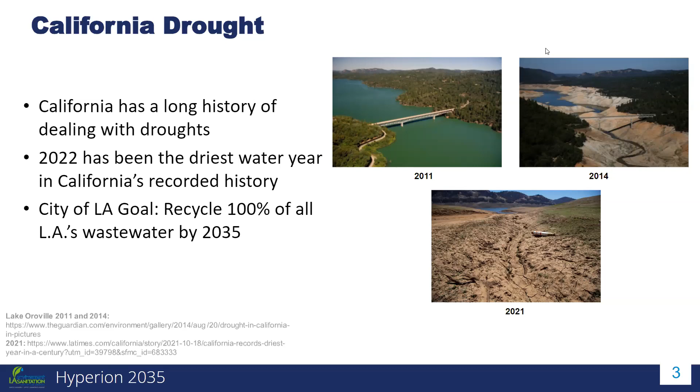So we definitely, as a city, our main goal is to end up recycling 100% of the wastewater coming into the city by the year 2035. This map shows where LA currently gets its freshwater supply. The majority comes from the State Water Project, Colorado River Aqueduct, and the LA Aqueduct. Currently we get about 17% of our water from local sources, about 15% from groundwater and about 2% right now from recycled water sources. We want to work on eventually recycling all the wastewater coming in, which can help us become more resilient to droughts and also other natural disasters like earthquakes that can impact our water infrastructure in the state.

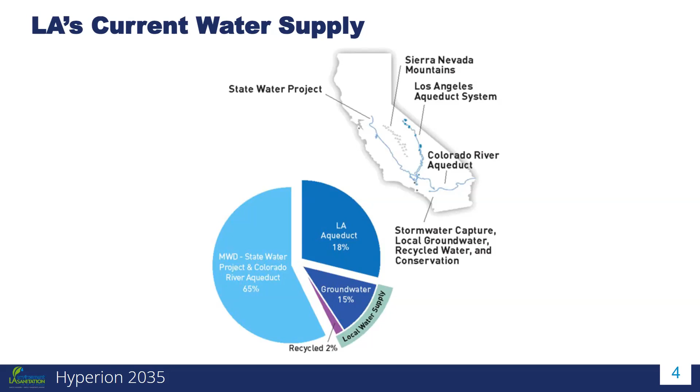So the evolution of water reuse. To provide you with some history, water recycling and reuse has actually been around for a very long time. There's evidence of agricultural irrigation with wastewater back in 3000 BC in Greece. Beginning in the 20th century, planned water reuse became very important as a way of conserving our freshwater sources, so landscape irrigation became more common. In more recent years, industrial reuse and groundwater recharge have also become more available. Since advanced water reuse technologies have improved, we've also been considering indirect potable reuse, which is implemented in some areas, as well as eventually direct potable reuse. Regulatory agencies like the State Water Resources Control Board in California are working on finalizing regulations for direct potable reuse currently.

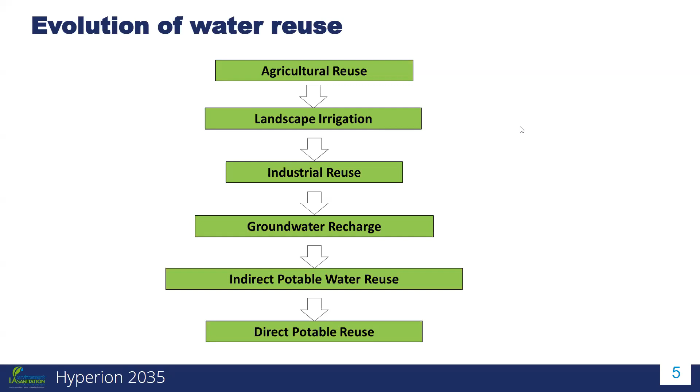This schematic shows the process for indirect potable reuse, or IPR. The idea is that wastewater coming from residential, commercial, and industrial sources, after it goes through conventional wastewater treatment, would also go through advanced treatment. There are two types of indirect potable reuse here. The first is groundwater augmentation, where following advanced treatment, the water could be spread or injected into a groundwater aquifer. The other type of IPR involves surface water augmentation. Both options essentially provide an additional environmental buffer following the advanced treatment. After a certain amount of time, approximately a couple of months for groundwater augmentation and several days for surface water augmentation, the water would be sent to a drinking water treatment plant and then distributed back to the city.

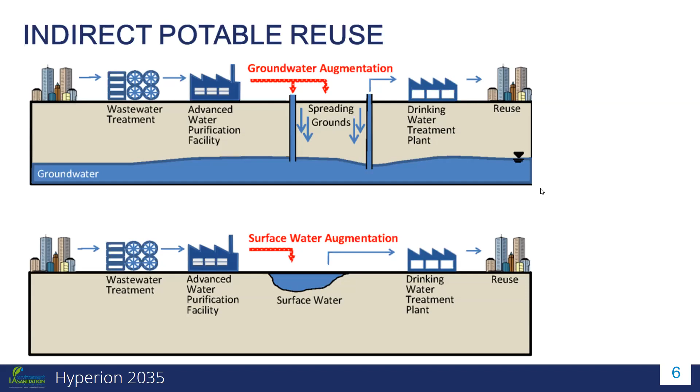And this is a schematic for direct potable reuse. So this is what we're working towards eventually. There are two types of DPR that we can talk about too: raw water augmentation and treated drinking water augmentation.

For raw water augmentation, following wastewater treatment and advanced treatment, the water could be sent directly to a drinking water treatment plant and then distributed back to the city. For treated drinking water augmentation, following the advanced treatment, that water would be considered clean enough to enter the drinking water pipelines directly and be distributed.

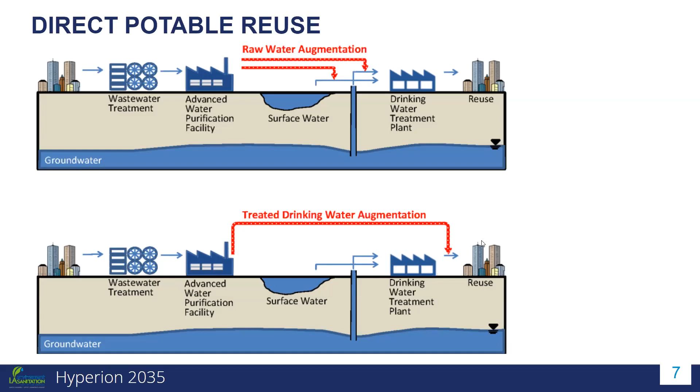So now to get into an overview of LASAN's Clean Water Program and how we've implemented some of these water recycling programs, as well as what our plans are for the future.

As I assume you know, wastewater is generated from residential, industrial, and commercial sources. So if you live in the city of LA, if you take a shower or flush the toilet, brush your teeth, the wastewater is going to end up at one of the 4 water reclamation plants within the city. LASAN also has extensive pre-treatment programs where we work with industries to make sure that what they're putting into the sewer system meets certain requirements.

That's to make sure we can treat the wastewater reliably, and that helps us protect our water reclamation plants as well. So the wastewater then flows through pipelines, either through gravity flow or through pumping stations, and goes to the water reclamation plants for treatment. Currently, the treated wastewater could be either safely discharged to an ocean or a river, or it could be reused for a variety of purposes, like industrial use or cooling water, as well as seawater intrusion barriers. The city's goal is to ultimately close this loop and redistribute the recycled water back to the city.

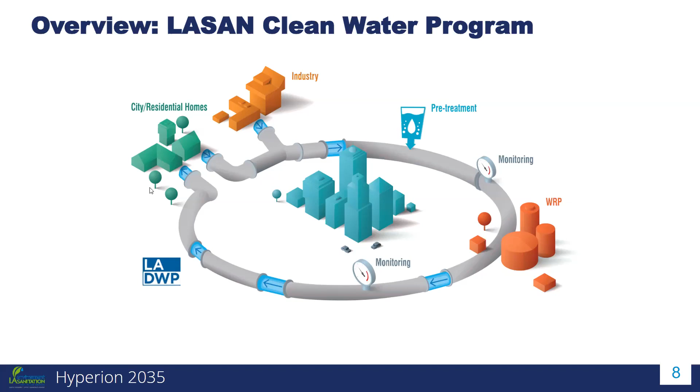So this map shows LASAN's service area. LASAN serves a population of over 4 million residents with an area of approximately 600 square miles and a sewer system length of 6,700 miles. We operate 4 water reclamation plants: Donald C. Tillman, LA Glendale, Hyperion, and Terminal Island.

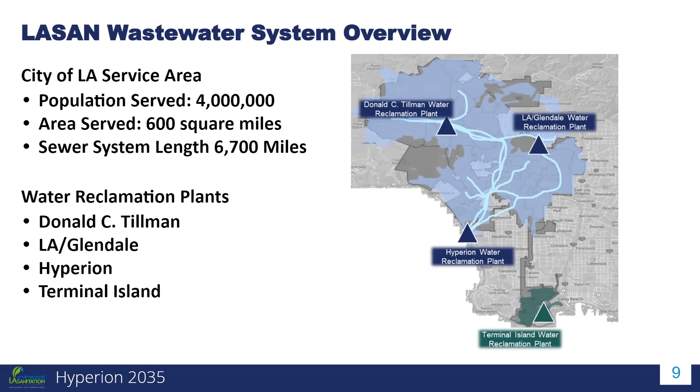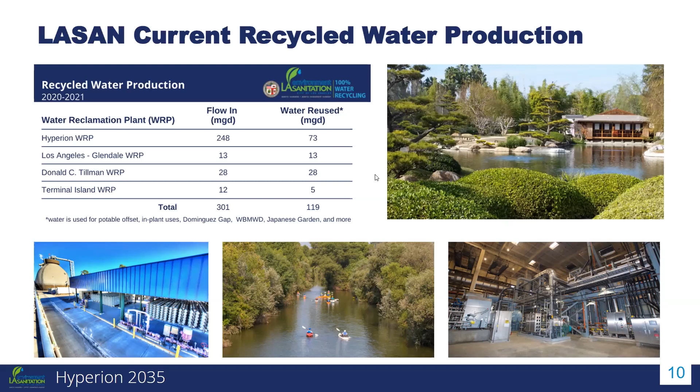And at this point, I'll pass it back to Ryan. I believe he had some questions for us.

All right, so I was able to successfully unmute myself. I wanted to interject because I have such a strong interest in water recycling, which is really exciting effort that we're undertaking. But when you're talking about wastewater, my understanding is that it's not really considered waste anymore, right? We're trying to recycle, reclaim it back. So what do you call it nowadays? And my follow-up question, if we're going to reclaim it, what are the resources that can recover from the wastewater? Maybe we'll cover that in the next slide, but maybe that might be something we all have in common. So I look forward to hearing from Nasir for the rest of the presentation.

All right, thanks Ryan, excellent point and good question. As you mentioned, in recent years there has been a paradigm shift, right? So wastewater is not considered waste anymore, it's considered a resource, and in fact it is a resource, right? So that's why at Hyperion Water Reclamation Plant, we call it Hyperion Water Reclamation Plant. We used to call it, not too long ago, Hyperion Wastewater Treatment Plant, but not anymore. Now we call it Hyperion Water Reclamation Plant.

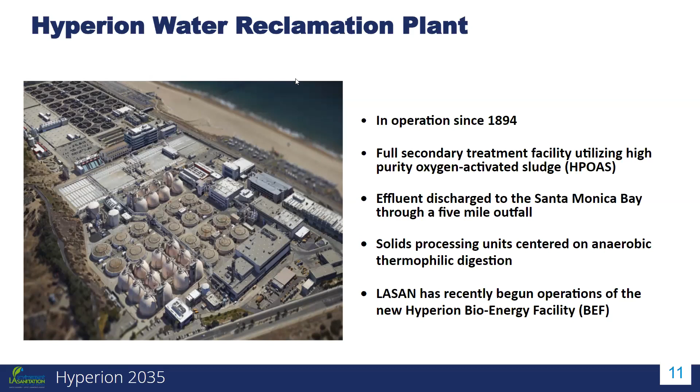After that, we have primary treatment. Primary treatment is to remove suspended particles and some of the pollutants and organics through some large basins by gravity. Why do we prefer gravity? Because gravity is free, so we don't have to consume energy. So it's a very effective and efficient way of removing some of the particulate solids, using primary clarifiers.

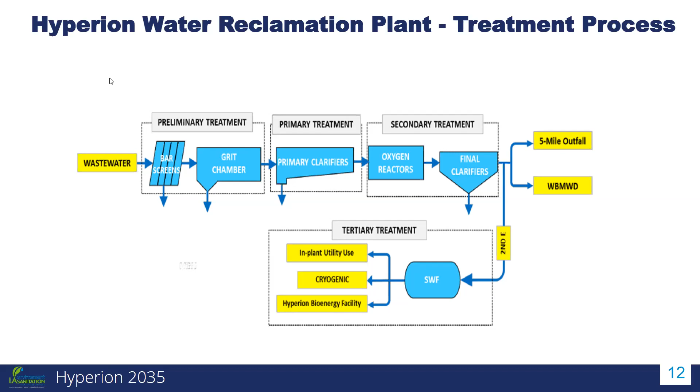Next slide, please. All right, so earlier, Kimia talked about climate change and all the challenges that we're facing: drought and water scarcity. In California, imported water is not a reliable and sustainable source due to seismic vulnerability, climate change, drought, and environmental impacts at the source. So it makes sense to maximize supply from local sources, mainly recycled water, that Kimia mentioned earlier.

So in February 2019, our mayor Eric Garcetti announced Hyperion 2035. This program is to recycle 100% of all Los Angeles wastewater by 2035, and to source up to 70% of all water locally by 2035. Right now, approximately 85% of the water we use in the City of Los Angeles is imported, from the California Aqueduct, Los Angeles Aqueduct, and Colorado River, as Kimia mentioned earlier.

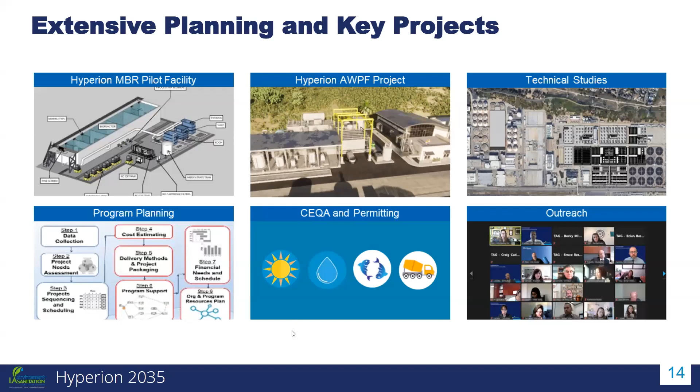So I talked about the MBR pilot project earlier. Again, as I mentioned, this is the proof of concept and cornerstone for Hyperion 2035. This project is a 1 million gallon per day project. It's a joint effort between LA Sanitation and Environment, Los Angeles Department of Water and Power, and West Basin Municipal Water District. The objectives of this project are to obtain regulatory approval for potable reuse application as part of Hyperion 2035, to compare different membrane bioreactor treatment technologies side by side, and also to develop design and cost criteria for the future project, Hyperion 2035.

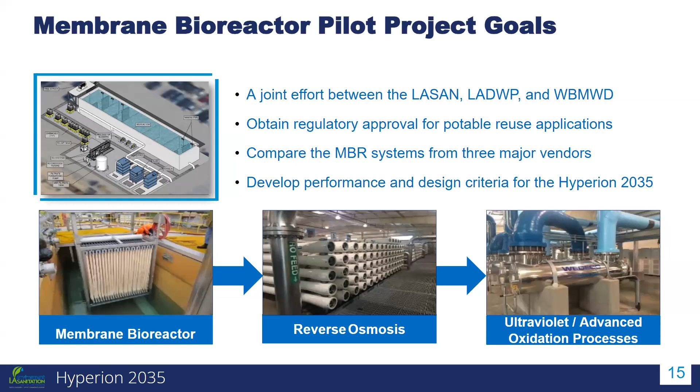So key treatment components that we're testing as part of this pilot are membrane bioreactor or membrane separation systems. These are like spaghetti-like membrane systems. Then followed by reverse osmosis, followed by what we call UV advanced oxidation process. So those are the core of the treatment process for MBR pilot and for the future Hyperion 2035 facility.

So then we have a pump station downstream of the primary basins or primary clarifiers. We have a fine screen to remove any large debris that is remained in the wastewater. And then we have our bioreactor, which is an advanced bioreactor as opposed to the conventional, like existing, bioreactor.

This is a process we call nitrification, denitrification, and the main objective is not only to remove organics, but also to remove nitrogen-based contaminants, or what we call nitrogenous constituents, like nitrite, nitrate, ammonia, etc. Because with the conventional treatment, like the existing treatment, you won't be able to remove a lot of nitrogenous constituents, but with this advanced bioreactor, you will be able to remove nitrogenous constituents in addition to the organics.

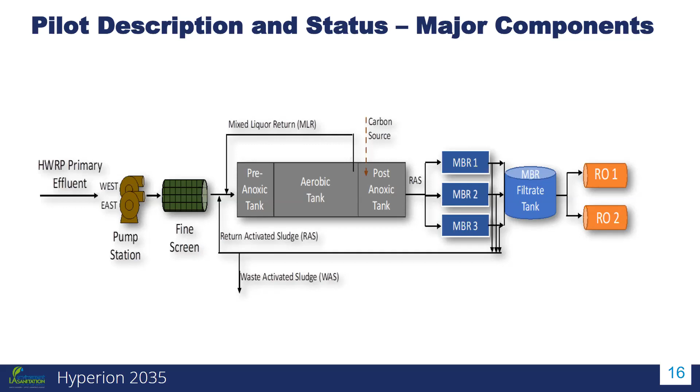So this is a schematic of the MBR pilot facility. You can see the bioreactor, and you can see the MBR, or membrane bioreactor, separation systems. Kimia, if you can point out the fine screens, then the bioreactor, then the MBR separation systems, the three systems I mentioned, and the reverse osmosis. There you go.

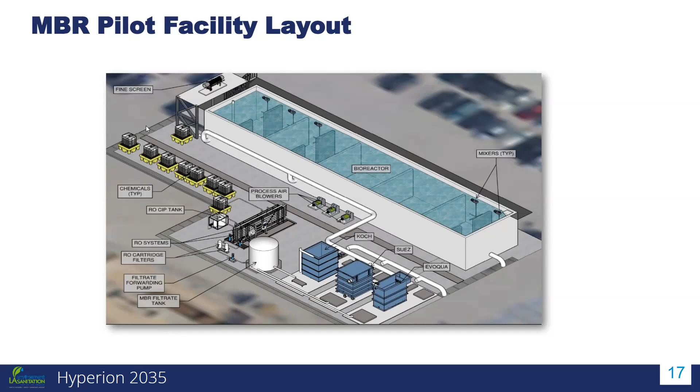Thank you. And we're using some chemicals for the treatment process, so the remaining components are the chemicals for the treatment process. Next slide, please.

Obviously, our aim is to maximize the recovery. The more we can recover, the better. But there are some challenges. If we push it too hard, we're risking membrane fouling and other issues. Next slide.

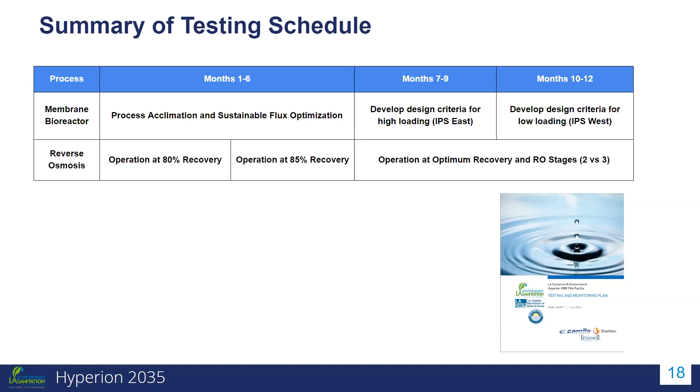So again, we have developed a testing and monitoring plan for the MBR pilot facility. We're working closely with regulators, including the Los Angeles Regional Water Quality Control Board and the State Water Resources Control Board. We have formed an independent advisory panel, administered by the National Water Research Institute, for the regulatory approval of the Hyperion MBR pilot facility. These are the project partners I mentioned earlier, LASAN, LADWP, and West Basin, and they are all contributing to our testing and monitoring plan. Next slide, please.